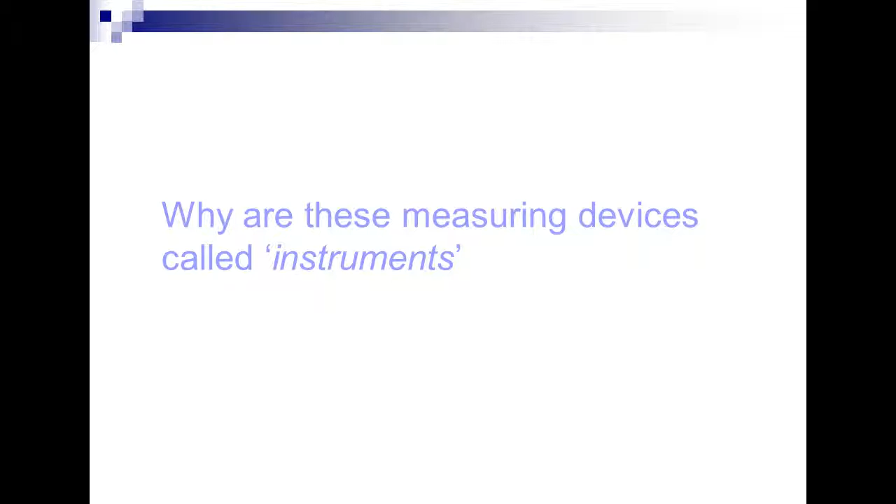So what do we do? What devices will we look at that we measure with? That y'all measured with? Calipers, micrometers, tape measures, rulers - which tape measures and rulers are basically the same - air gauge, right? Okay, tire gauge.

What is accuracy? Tire tape? What's a tire tape? Oh, okay. Round tire - I didn't know that. I always called it a tape.

There you go - free of any errors, especially as a result of care, right? Able to give an accurate result. So this is accuracy. And this slide - this is not my slides, by the way - the guy didn't put his name on it. I wish he did, because it's a pretty good pair of slides.

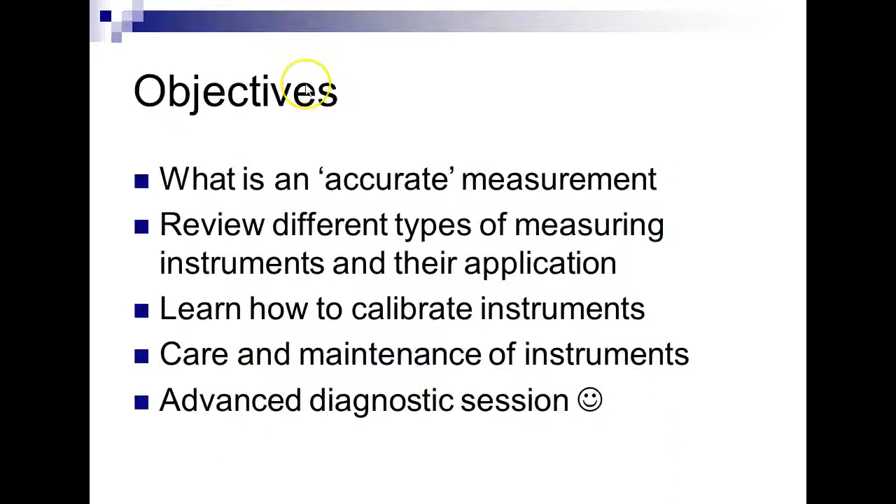But this guy must have been a mechanic. And so what he talks about is failed measurements. We had a Cub Cadet riding lawnmower that we used to rebuild, and we'd do everything. And what happened is we decided to rebuild it, but the people who was maintaining it before for our neighborhood - it was our neighborhood mower - the engine messed up on it, and they took it off and had it rebuilt.

And what they did is they put different heads on it. Of course, the heads wasn't quite as long, so they came in and replaced all the valves, everything that did that. But when we went out there, one of the - what do they call the push rods on the bottom that run - that's what they call it, that pushes up the piston - yeah, it broke. So we went and ordered it, and the guy looked our motor up.

He looked up the motor on there, and gave us the rod. We went back, put it on, and as soon as we started cranking it, you could hear the piston hitting up against the stop because of what? Bad measurements. So when we took it out...

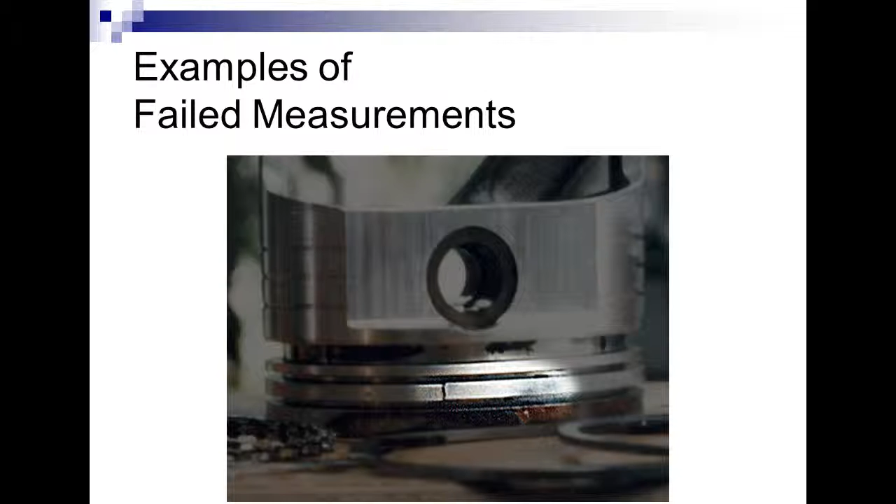The guy come out of the shop - he was really... guys, I forgot his name - he was down here on Highway 150. He came out and noticed a number on the side, and he said it was a different block that they had put on there. So they didn't put the right block on there, so we were using the wrong measurement. Luckily, we caught it right off the bat, and there was really no damage to it, but we had to go out and he had to give us the right push rod for that block.

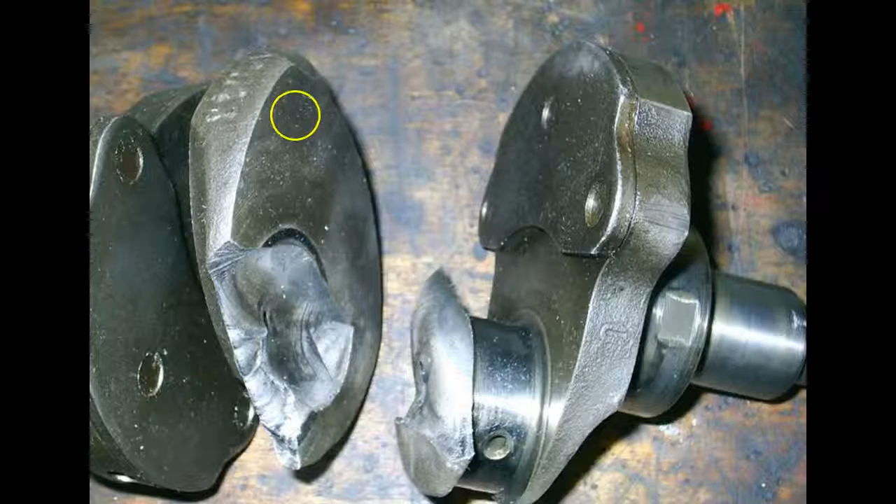So this is kind of stuff that could happen - this is what could happen right here. So just having the wrong measurements, not putting something in there right - it's stupid, right? This is not mine, guys.

So this wasn't in the top - so this guy didn't cover rulers. So we have rulers, we have metal rulers, we have machinist rulers. And so we got this inside our box. So what's the difference between a metal ruler and a machinist ruler?

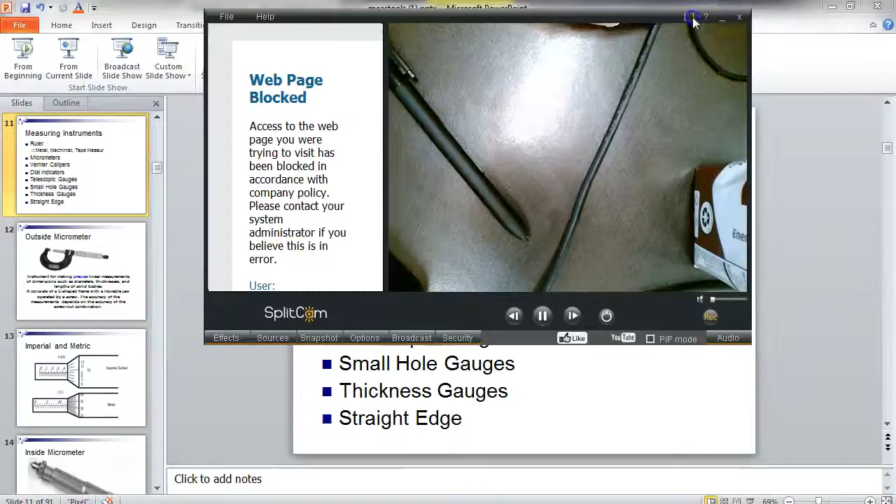Metal ruler is longer, machinist ruler short. So this is our metal ruler. It's in the top. So if you look in the top, it's in a little slot right here. This is a metal ruler. This has inches on one side, and it's got centimeters and millimeters on the other.

Oh, I'm sorry, I got it froze. It is recording. I was looking at the grade book a while ago. Is it up there now?

So centimeters. So this would be centimeters here, right? Where am I at? Way down here, guys. So this would be centimeters. So each one of these small little slashes, there's 10 of them. So those would be what? Millimeters. Yeah. So this is pretty standard for most metric. So the best we could do on this would be millimeters. That would be how accurate it would be.

This is the machinist tool. The other ruler. I must have got it out. Now this one, you can get it in inches also, but this is in millimeters. So this would be 10 millimeters, right? Which would be 1 centimeter, right? You understand? Is that okay? And then this would be half millimeters down there.

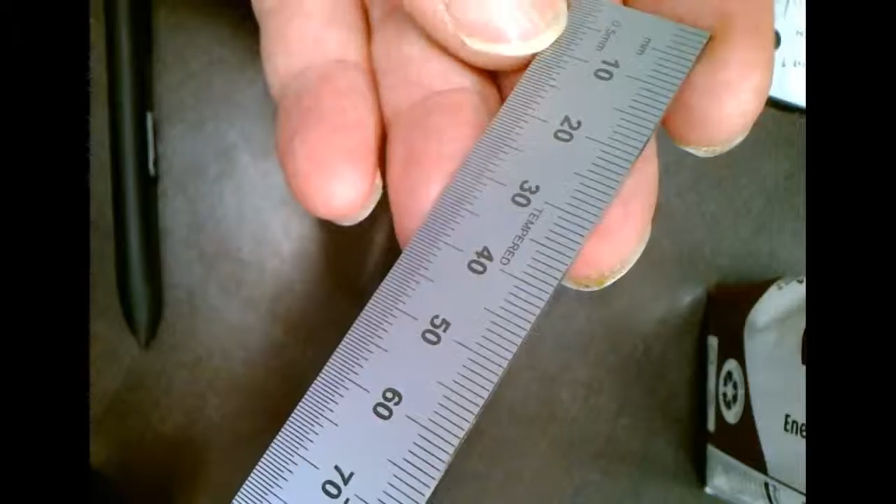This is more accurate. But what makes it the machinist tool is, what they do on this one, because they know these get used a lot in gloves and stuff like that, so to prevent the numbers from wearing off, all these are actually, can y'all run them across that? You can feel it. They're etched in to keep them from doing what? Wearing off, yeah. So that's the difference between this.

So these basically here, and I've got rulers over there now that the numbers are actually wore off just from doing what? Handling. So that's one of the things that they talk about a machinist ruler, is that all the numbers and everything are engraved on there. So it means these right here won't wear out.

Of course, we use these to measure, and we also use these a lot as a straight edge, right? So these things are very accurate as a straight edge. So a lot of times when we're adjusting pulleys and stuff like that, we can lay a straight edge across that to make sure the pulleys and also the gears, the sprockets, are lined up correctly.

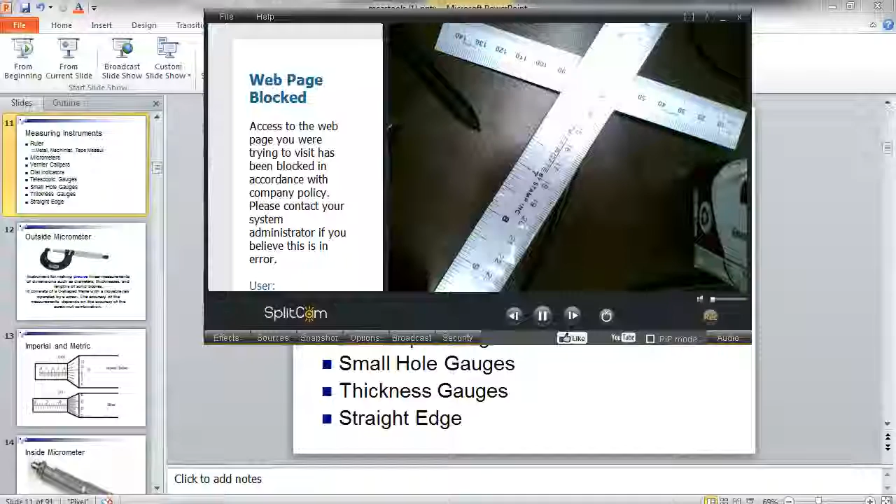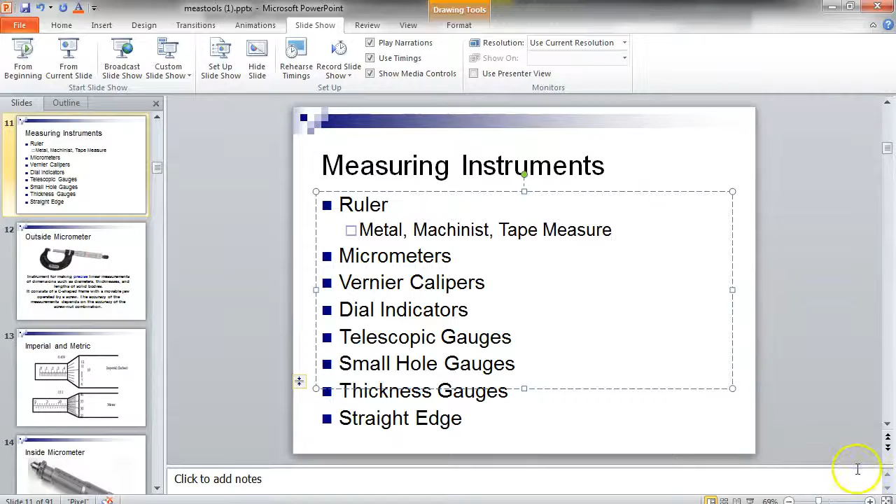And then of course, we have tape measures. So tape measure is also in here. So it's toward the front. So most of us hopefully have used one of these things. Everybody use a tape measure before? Yeah, a flexible ruler, yeah. Now these are not, we got carpenter's rulers. Y'all seen those? They basically fold out and they're big and they're usually made out of wood. And then we got wood rulers and then of course plastic rulers.

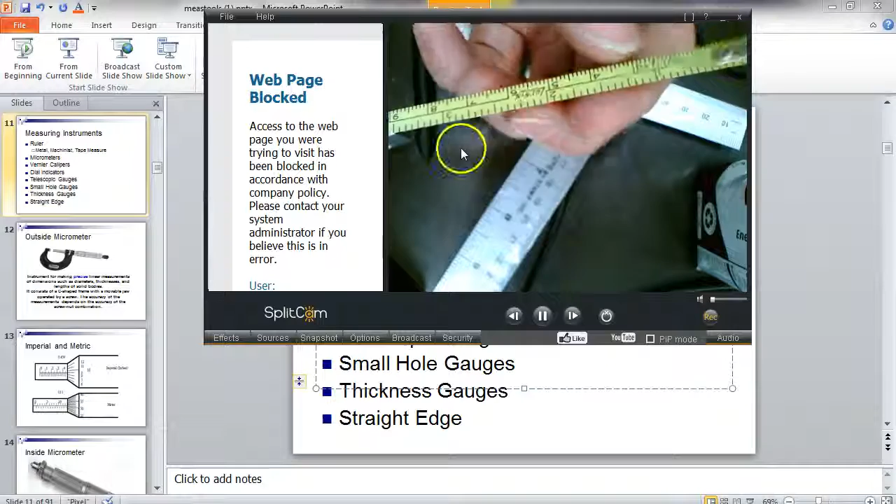So this one here that they've got in here, this has got centimeters, it's got millimeters, and then on one side it's got inches. This is usually the one we're going to use, and guys, you're going to have to get used to the metric system, right? You understand? So slowly, especially in our neighborhood, we're getting a lot of companies that come from over where metric is the thing that goes, right? And of course, metric to me makes a lot more sense because everything runs in tens, right?

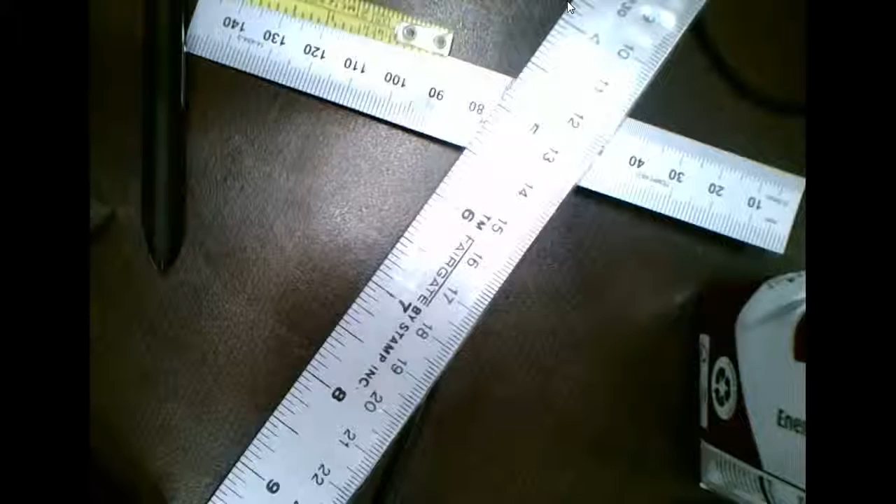So we got, how many inches in a foot? 12. Where'd they come up with that? How many inches in a yard? 36, right? How many feet in a mile? 5,280. Where'd they come up with that stuff, right? But in the metric system, everything moves in what? Tens. Yeah, which is even in temperature. How did they come up with 32 degrees freezing and 212 degrees boiling?

No, foot, I was told it was like a king's foot. Yeah, that's what I learned. It was some king, and an inch was the space between the tip of his finger and his first joint and stuff like that. That's what I learned, the way they came up with those measurements.

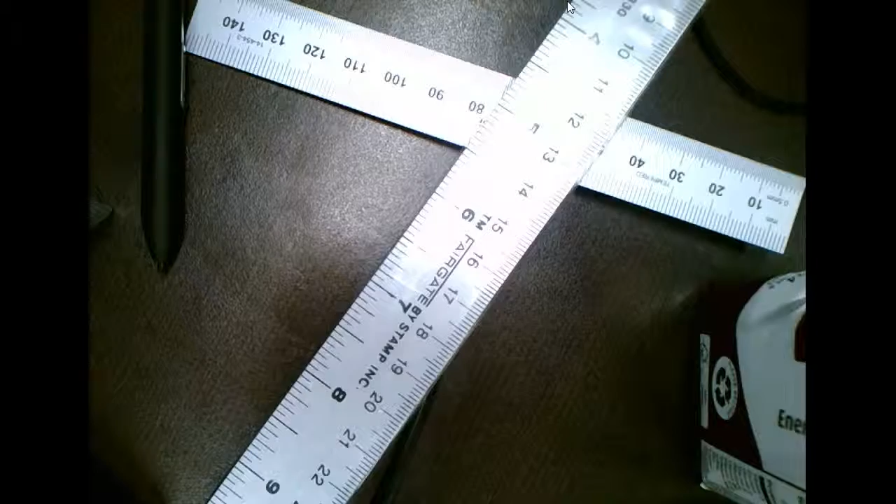Egyptians used something else. They used cubits. Like on the tip of the finger to... Yeah, we used to say a yard was from the tip of your nose to the tip of your fingers. That's why they came up with the yard. But I don't know how they came up with an inch. Why they called it an inch?

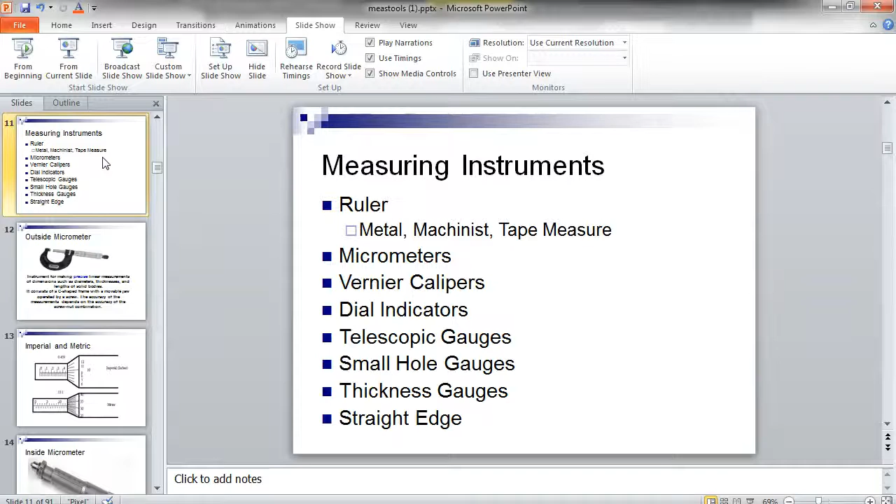So then we're going to look at micrometers. We're going to look at calipers, vernier calipers, dial indicators. We don't have any telescopic gauges or small hole gauges or thickness gauges, but we've got the equipment that gives us the ability to do this. So the first one we look at, so you can pull this out. This is called a micrometer. And this one is fixed.

So this is in millimeters, and it'll measure from 0.01 millimeter, which would be how many microns? 0.01 millimeter. How many microns? That'd be 10, right? So 0.1 millimeter would be 100 micrometers, but most people call it micron.

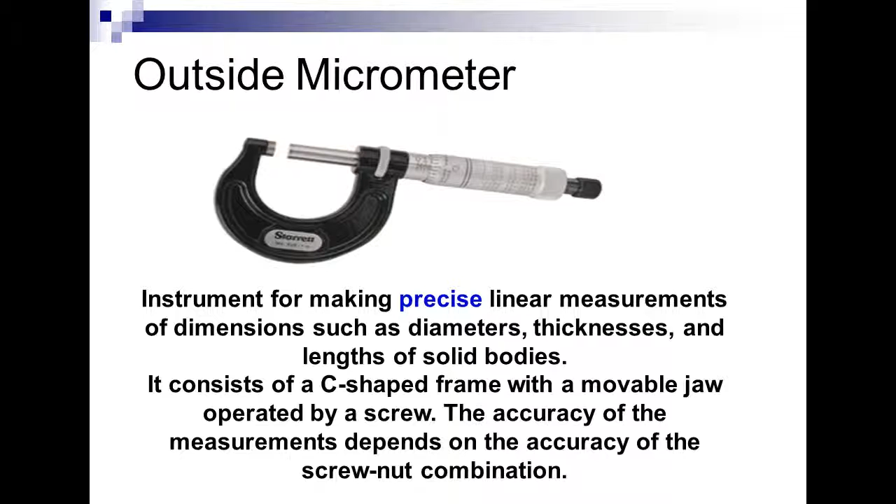So let's look at the parts. Let's see if they tell us the actual parts. Do they? Everybody got one they can see? So we use this to measure outside, right? We use these to measure thicknesses. Everybody okay? So y'all can pick this up and make sure you just don't drop it. We never ever want to drop precision tools, right? Everybody okay?

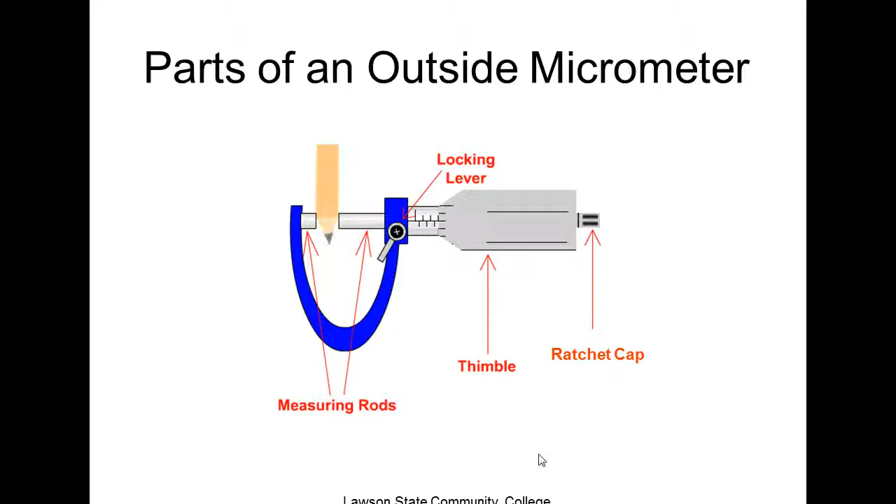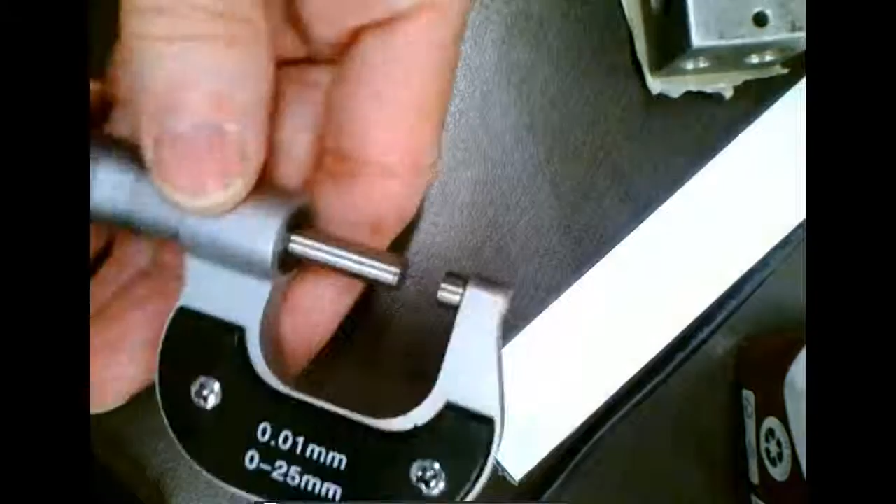Now what we do, guys, is we put what we want to measure the thickness of in between the rods, right? You understand that? And then we start turning the thimble until it gets close. And then we move to the little ratchet and we turn it until it clicks once. Okay. So y'all can just put that in, it don't hurt. So let's just put it on our finger or something like that, and let y'all do that. So this is for coarse adjustment.

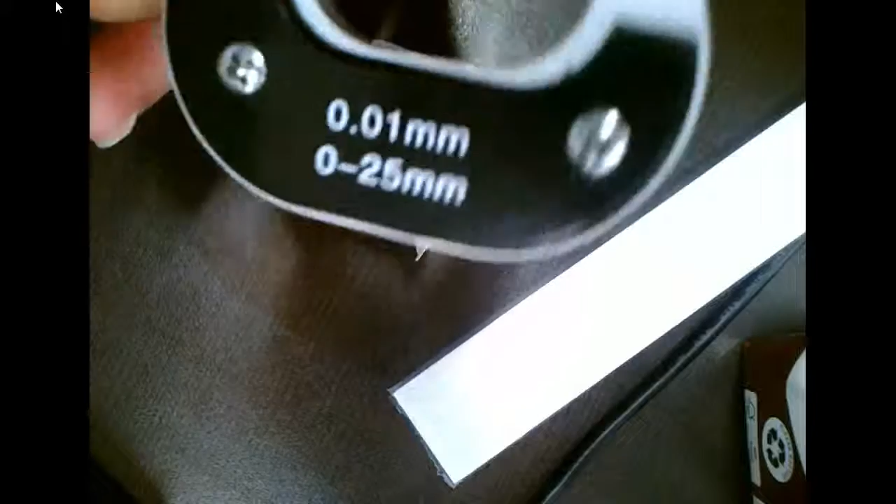And then what you want to measure, let's see if it'll measure this. No, let's do this. I move it this way. It's going to be close. No, it's not going to do it. So what we do is we take this and we turn it until we get close, right? The thimble. We turn the thimble until it gets close, right?

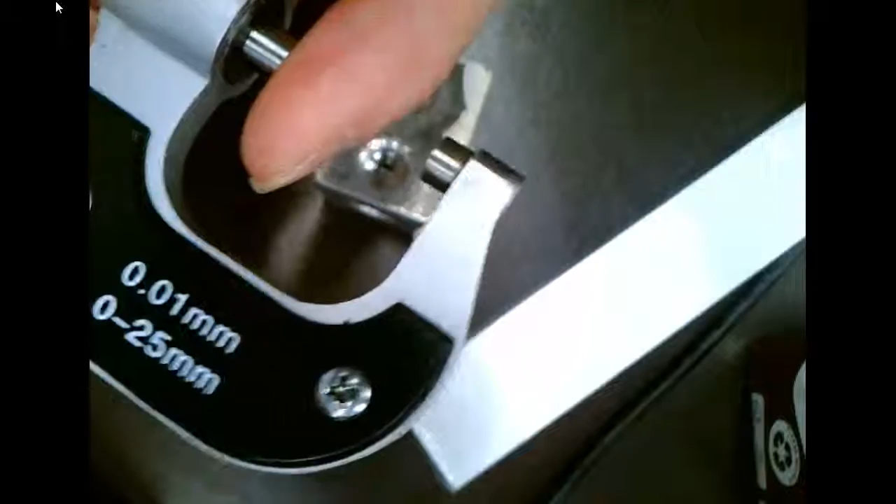And then when we get close, what do we do? We stop and start turning the ratchet, and we want to turn it till it what? Clicks once, right? Raise this thing up. And then when it clicks once, then we've made our measurement, right? Everybody understand? That makes sense? Are we okay?

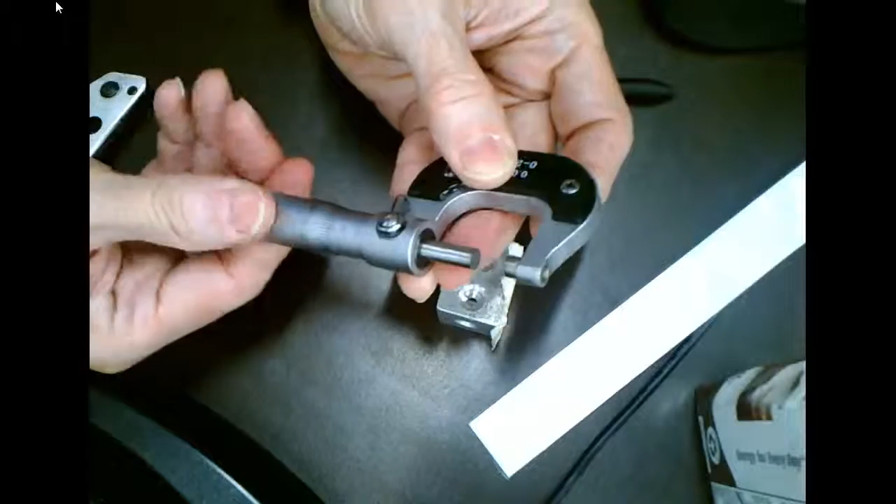Okay. Now this is the locking mechanism right here. So you notice when you push that up, then you can't turn the thimble anymore. And the ratchet doesn't mean anything anyway, right? You understand that? Everybody okay? Yes or no? So how are we going to read this thing? Let's look at the scale on this one.

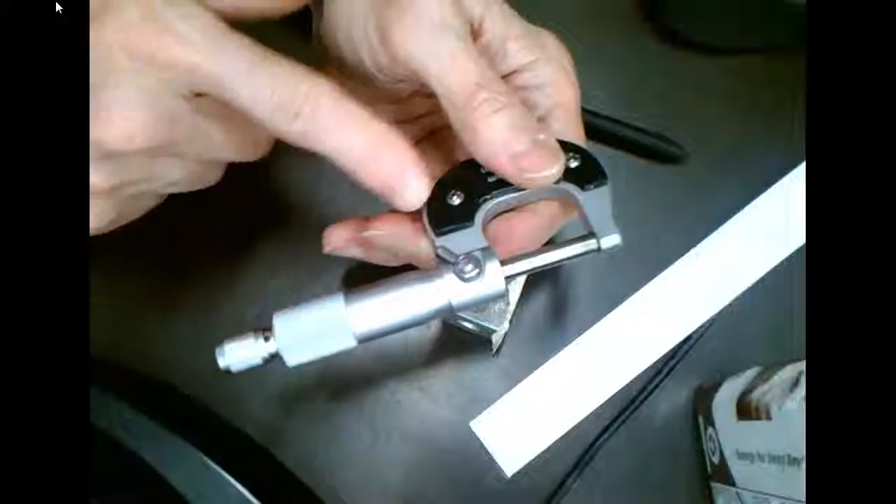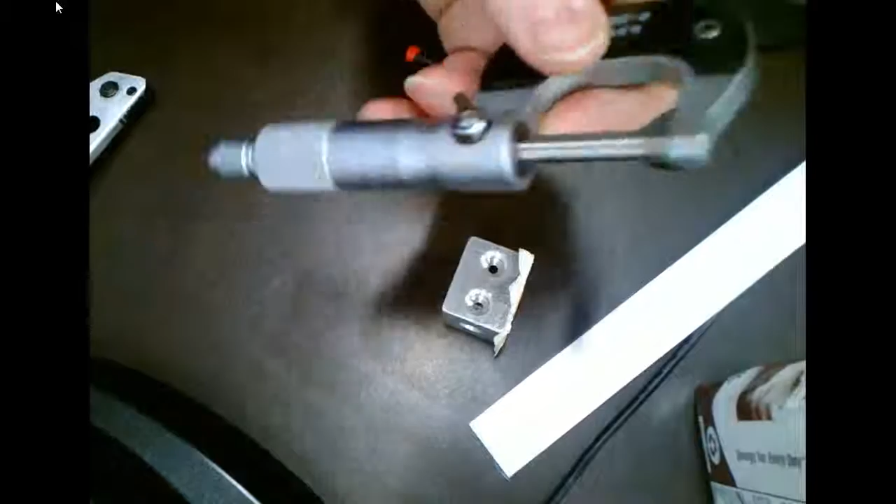First of all, we'll check to see if it's zeroed. So we turn it down, get it close, and then I'll come up here and turn it. So this is off just a hair, so we'll have to show you how to calibrate that. So when I got it on zero, the zero line on the thimble should line up with the mark on the part that the thimble goes into, right? That's what I'm talking about? Yes or no? Okay.

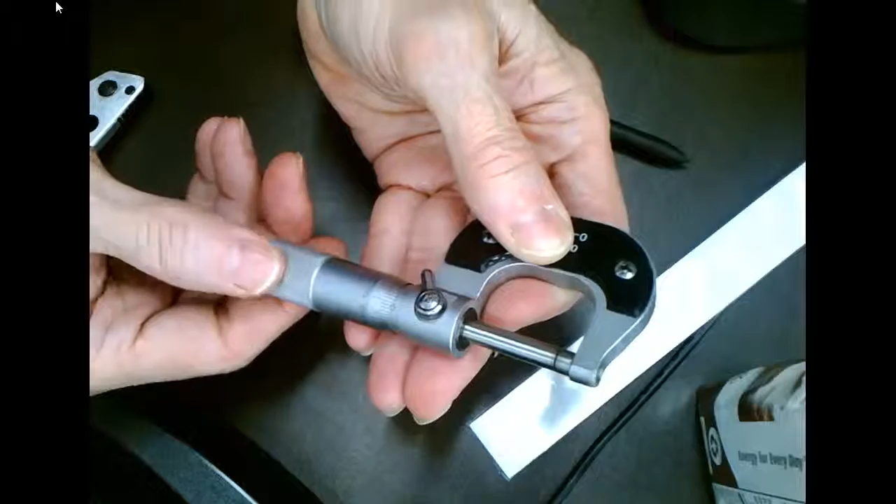So the way we read this, each one of these would be a millimeter. So I just went 1 millimeter. I just opened it up 1 millimeter, right? Understand that? So every time zero comes around, what we do is we look at the major line. Oh, I'm sorry. That is not 1 millimeter. This is 1 millimeter.

Now the way this mic is set up, this is a little different from the inch. See if I can zoom this in. Are y'all listening? Okay. So we got a mark up here, and then we got a mark down here. You see what I'm talking about? Yes or no? Yeah. Okay. And when we look at this, this is laid out in 50s, right? You understand? That makes sense?

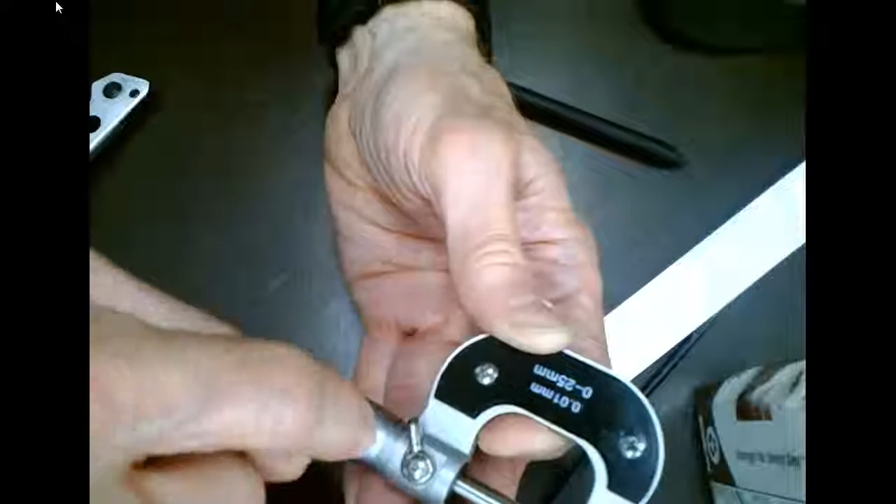So I come up here and line it up, and I start opening it up. Then it went around once to zero, but it's lined up with the minor division, so that's going to be what? Okay, I'm sorry. Okay, so it's lined up on zero, right? And I start opening it up. And I go around, oh, sorry, went past it. Okay, so that's zero right there. What would that be? Yeah, but I'm zero on the first one.

So this is zero. So we're looking at this line right here. So now it's lined up on zero. I know it's hard to see that. Y'all might have to come up here. It's the first one on the bottom. So if I call this the top, on the same side as it's got the numbers, okay, notice it's in 50s, right?

See that? Now when I turn it around to the first 50, that's going to be what? So then I turn it around again to the second 50. 100. And it comes up to the second line, right? You understand? So this right here is a millimeter. Are we okay? Well, if this is a millimeter, so to get a millimeter, I have to go around what?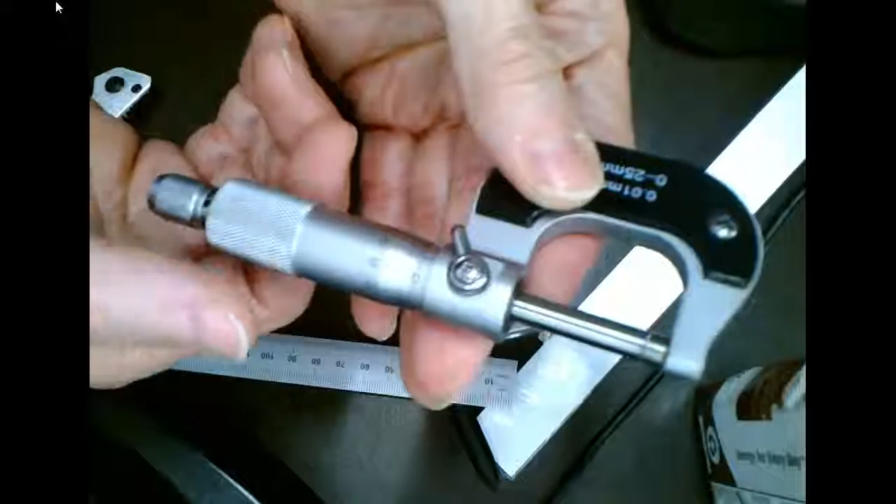So if I come over here and this is 0, right? Y'all understand? Then this right here, when I go around once back to 0, it's lined up on the second, the bottom. They'll come up here.

So this comes in 2 parts. So we have the stand for it, and then we have the dial indicator. The stand is a magnet, and you can turn the magnet off and on. Basically, it just pulls the magnet up. So when you turn the magnet on, if you got a piece of metal, it'll actually stick to it. And then we have all these mounts and this neat stuff right here.

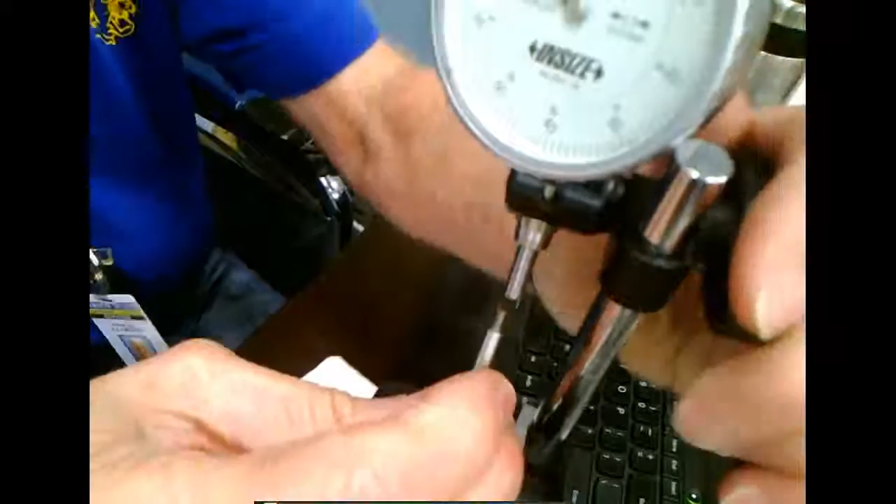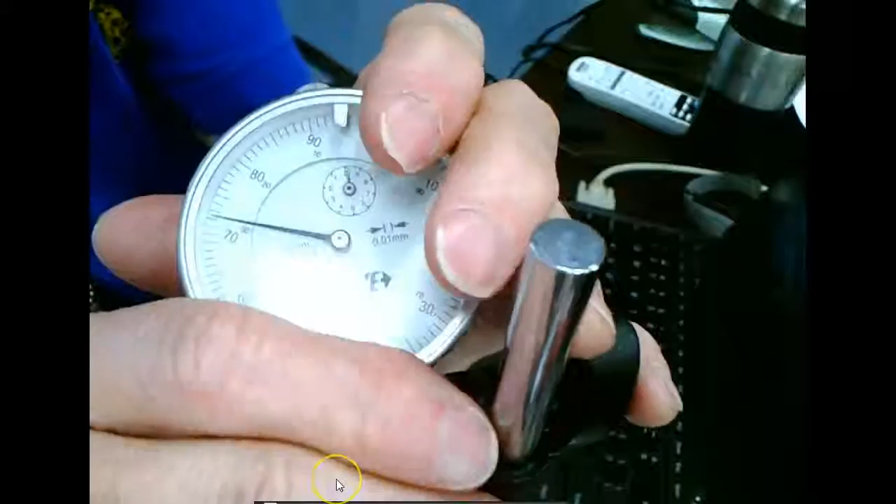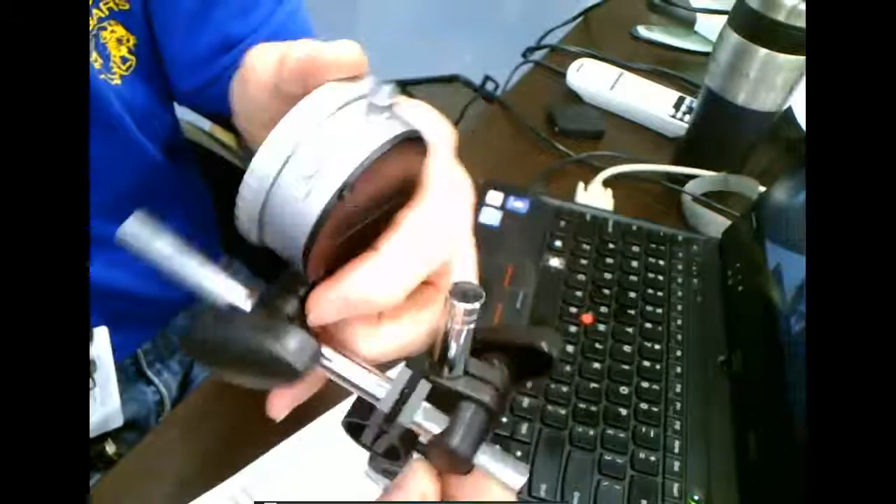So what are we going to use these guys for? Anybody ever use one of these? Okay. So what do we normally use these for? Very small, very small increments. Well, we can use them to measure the roundness of something, right? So what we can do is make sure a shaft is not wobbling on us.

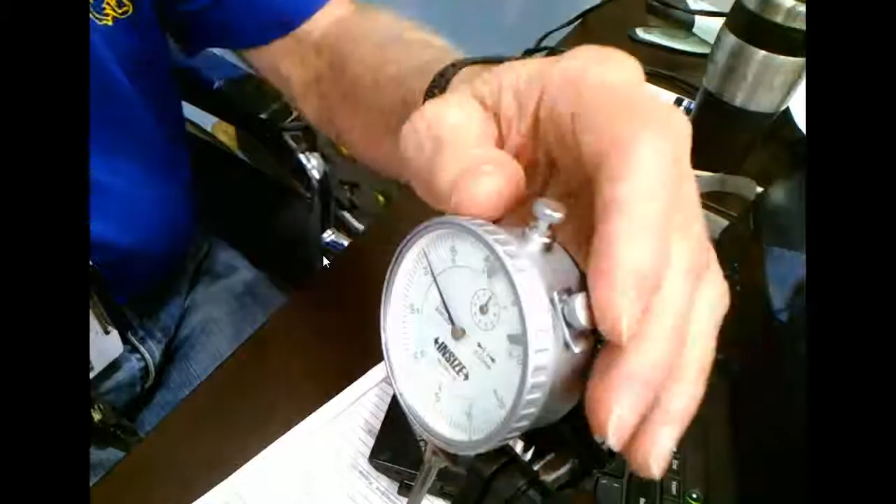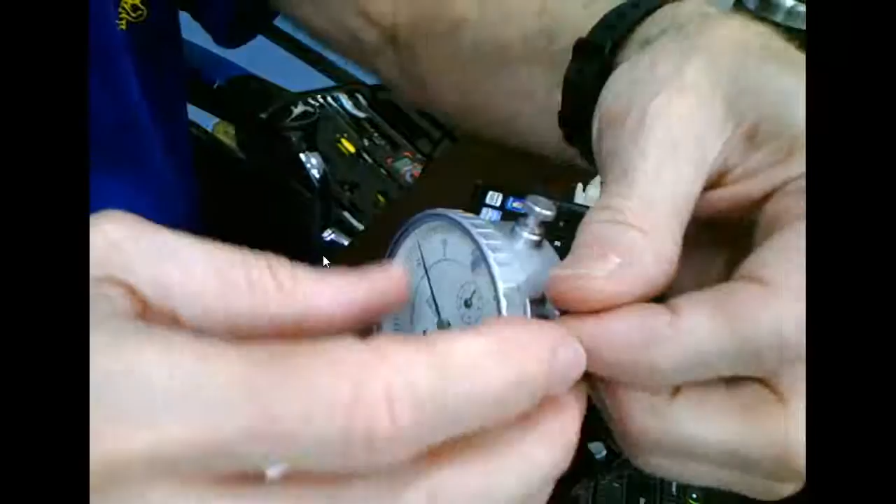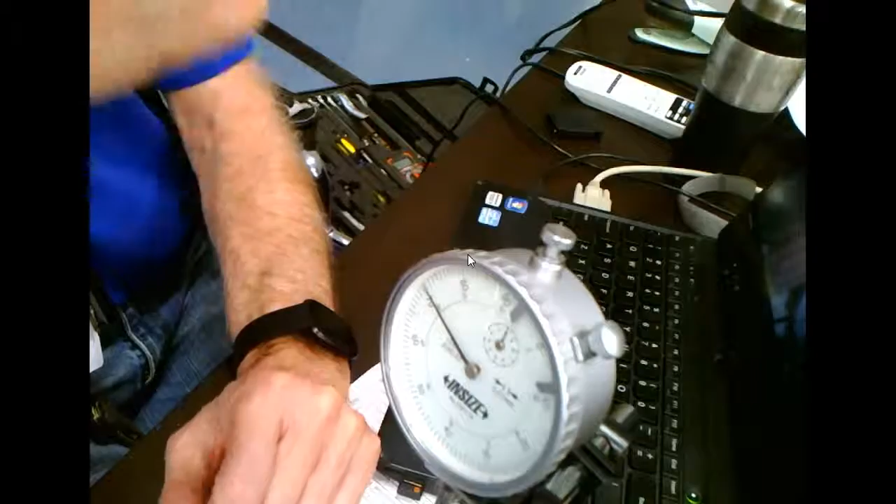So we can set the dial on one part of the shaft. We can zero it out. It zeroes out basically the same way that the caliper zeroed out. So we got this little clamp right here that we can loosen up. So we can put this on a shaft or something, mount it real solid, right? You understand? Put it on a shaft, set 0, and then rotate the shaft. If we ever see any wobble on that, we know that the shaft is not aligned correctly.

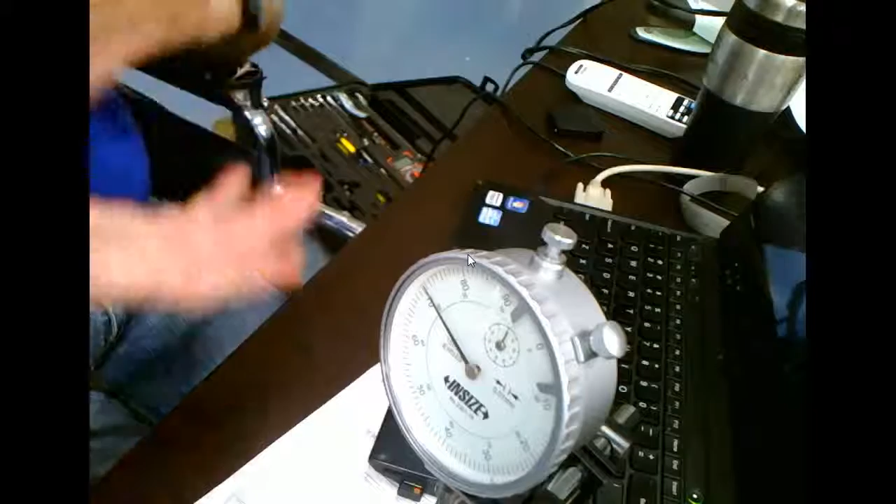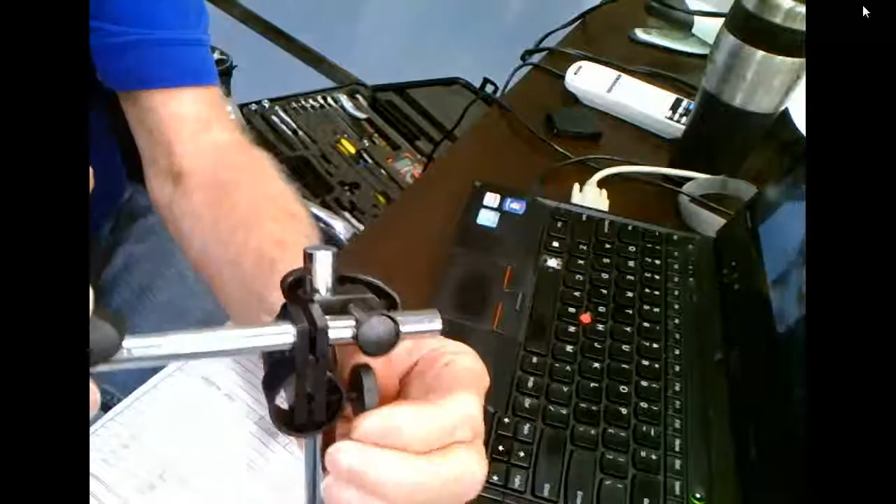So what we can do is swing it around, move it in and out. And then this guy right here would set the actual angle. Can y'all see what I'm adjusting? Yeah, this right here, you can actually change the angle. See what I'm talking about?

Okay, so what I've done is I've got a 0 set on it. And how do we set the 0? We break it loose right here, and then we can turn the whole face. Everybody okay? Okay.

Yeah, it's got the hand up here, right? Okay, so this right here would be 1 revolution. That would be 2. Y'all see what he's talking about? So it's picking up, guys.

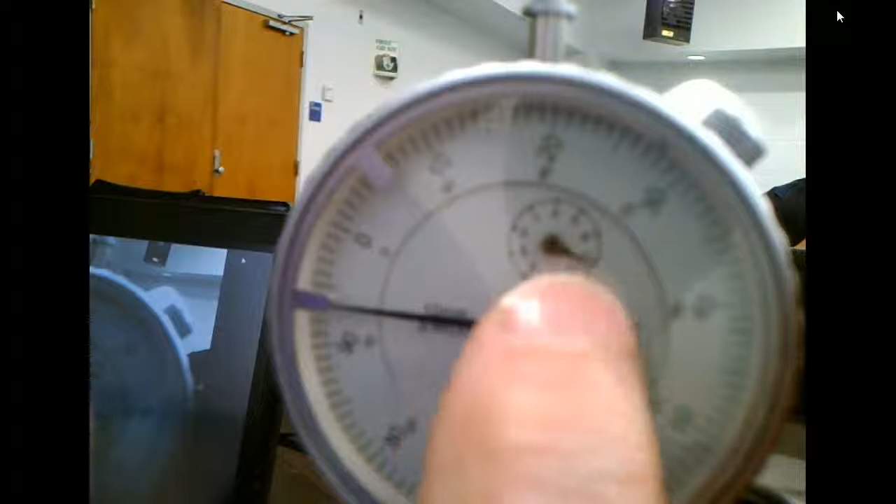So what would you measure? Can y'all see it? So this guy's sitting on 5. This guy right here is sitting on 6. Millimeters, right? So 6.95. Y'all see what he's saying? Can y'all see it? 6.94.

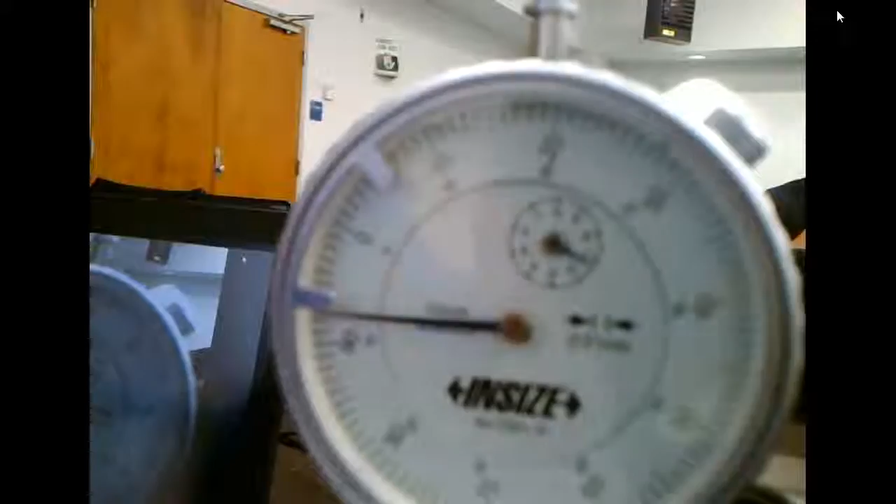Yeah, it's a piece of plastic, it's going to move. Yeah, that's 2. That would be 92, right? 92, right? Yeah, there's 10, right? So that's 0.01.

Y'all see that? That makes sense? Everybody okay? I see machinists use this a lot just to check, make sure the part is flat. So they'll move the part under there and see if it moves up and down, checking to see if their milling is done correctly.

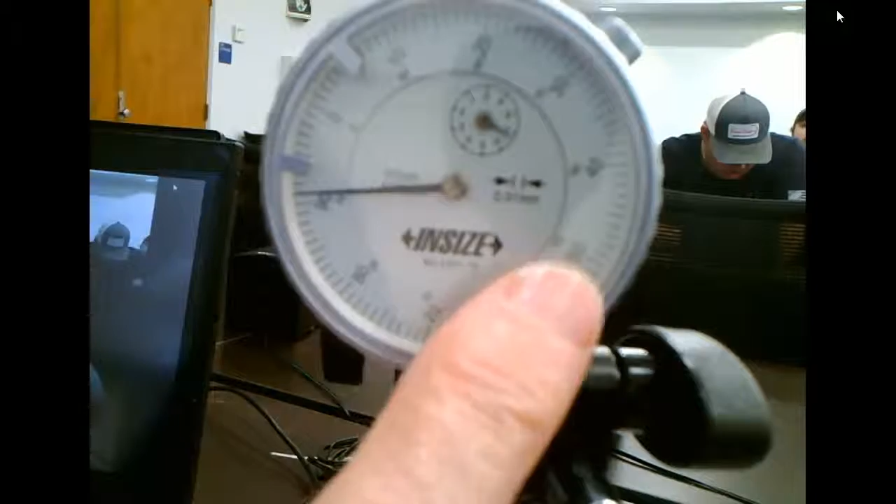I'm sorry, let me move it back a little bit and see if it'll focus. It almost focused. So I got a different measurement. This is made out of plastic, this is made out of... Oh, there we go. So now it's measuring a little bit different, but notice it's more than 6, less than 7, right? You understand that?

And each one of these minor divisions would be worth a what? So it'd be 6.98 millimeters. See that? Yes? No? That makes sense?

We have focused them real good. So first thing we do is look at our major divisions right here. Then we drop back and look at our what? Minor divisions. Everybody okay? That makes sense?

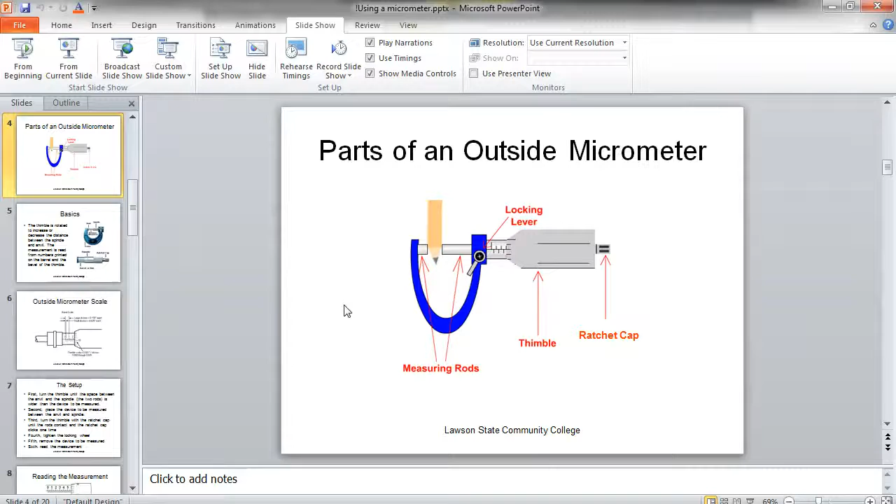We'll get different measurements. We have depth gauges, we have all these different things. Just about these 3 tools, though, you can make just about any measurement you need to make. So the rest of the PowerPoint shows you how to read it, right? Which we've already looked at. Set up. Forward.

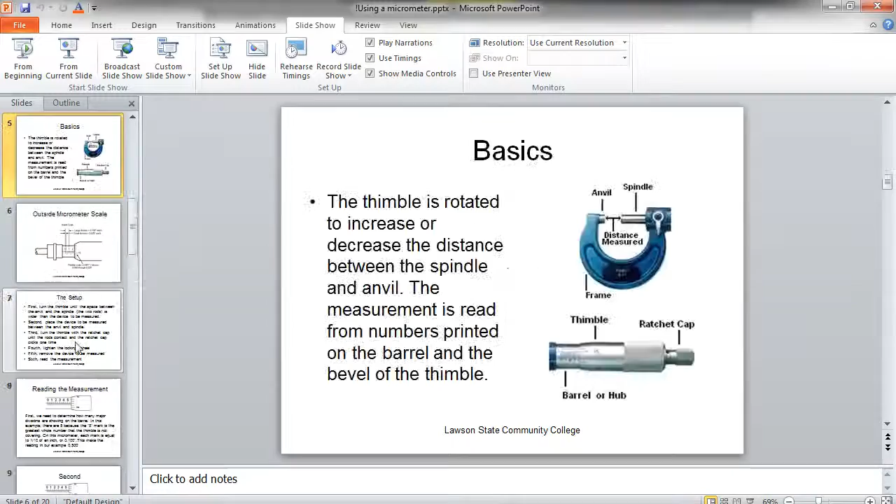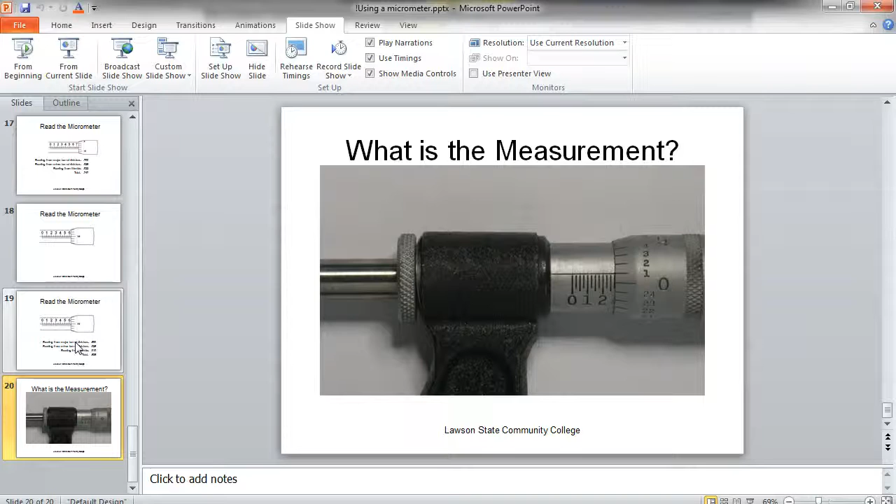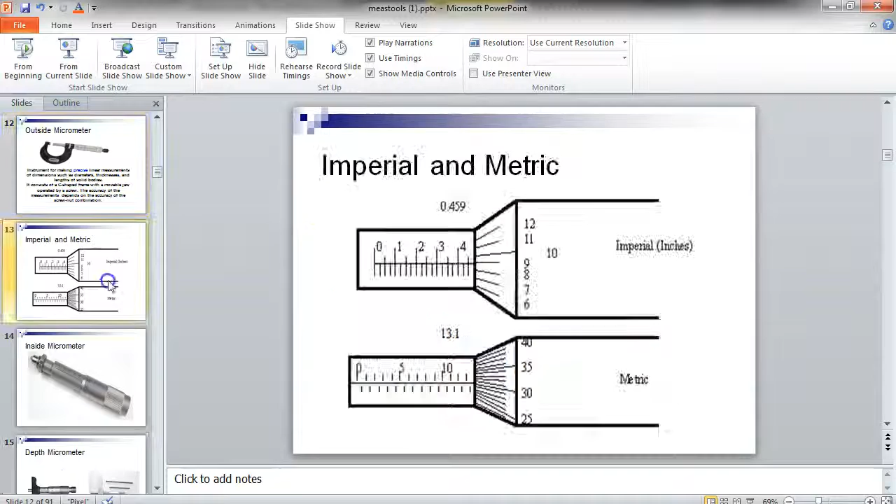Inside mic, but we can use our caliper for that, right? Depth micrometer, we can use the mic for that. Digital is really nice, this is what everything's going to. But what I say, if you learn how to read the mechanical ones, then you understand the digital ones a lot better, right?

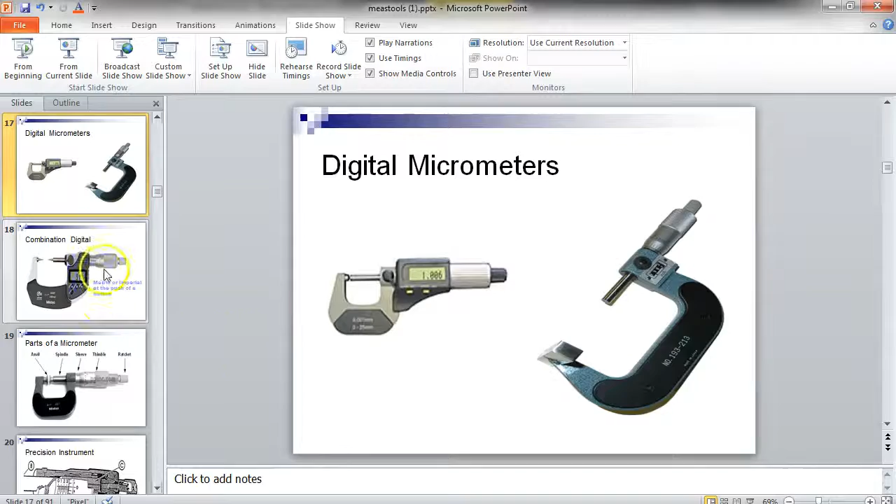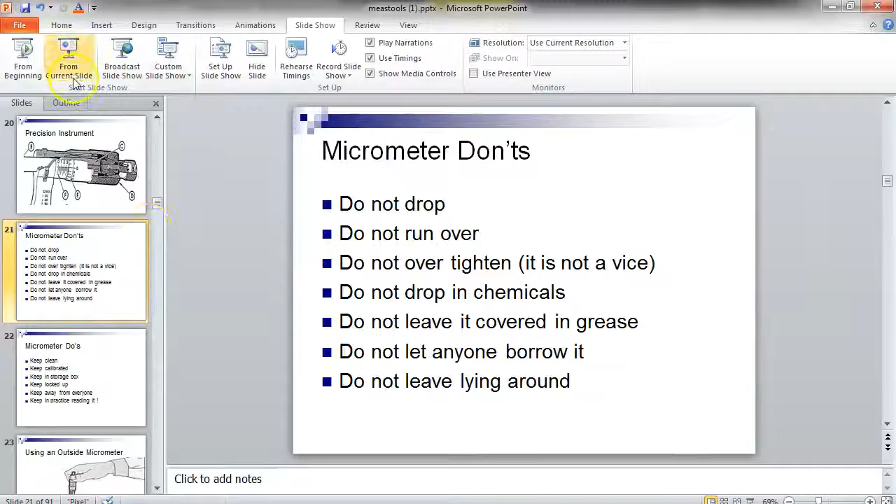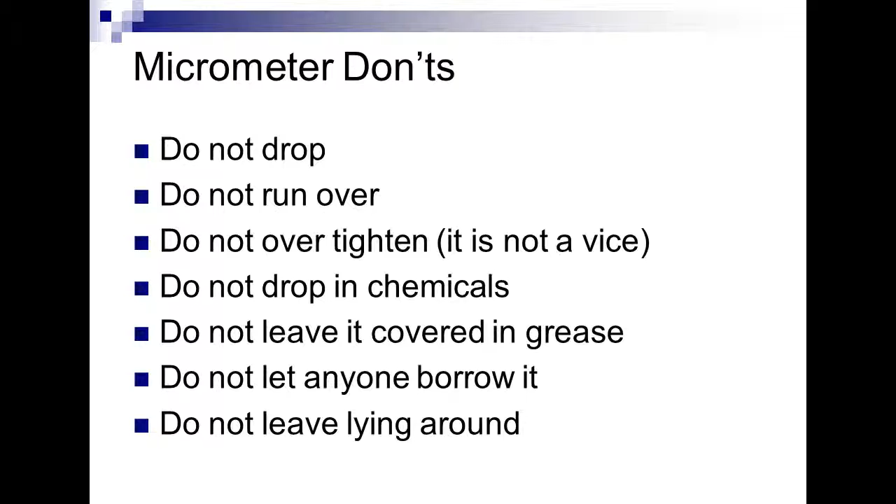So don't what? Don't drop. Don't run over, right? Don't over tighten them. Don't leave covered in grease. Take care of it. Don't let somebody borrow them, right? Don't leave laying around, right? And then fuss at them when they do that.

Keep locked up. Keep away from everybody. Keep in practice reading, right? These are pretty good rules.

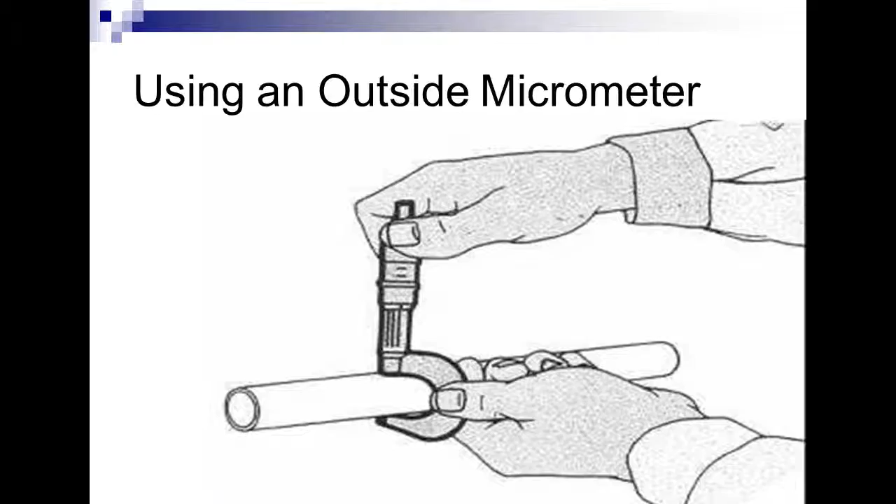Okay guys, what we'll do, when's our test? Next week. And we've got, we're doing okay. So let's look at our calendar. Right now we got one more thing we'll look at, and we'll finish the theory up at the first of Monday's class, and then Monday and Wednesday we'll work with putting the robots together and soldering them. So what we're going to do is...

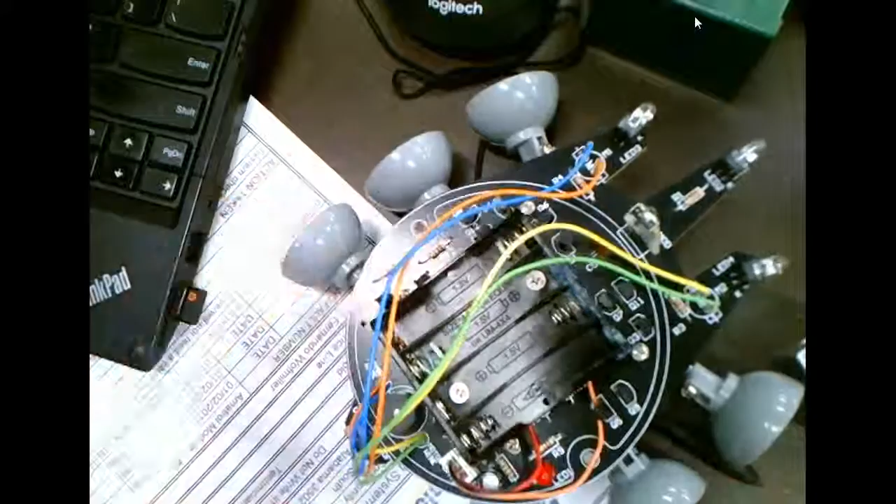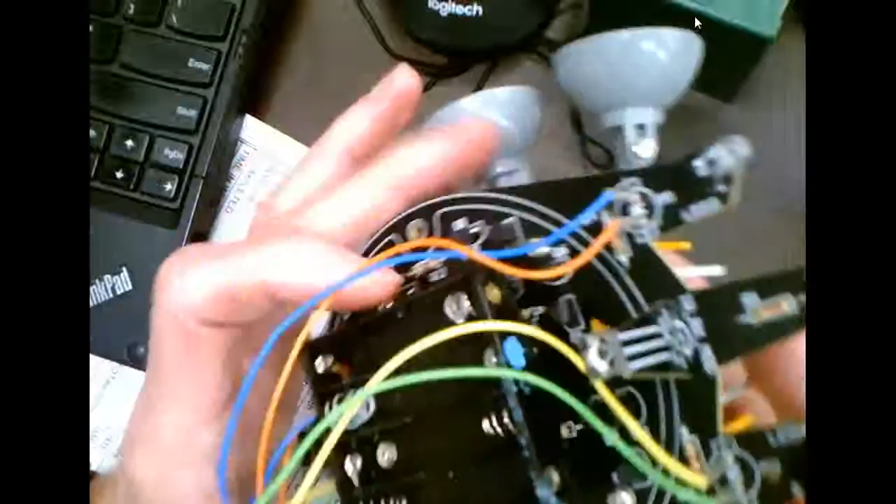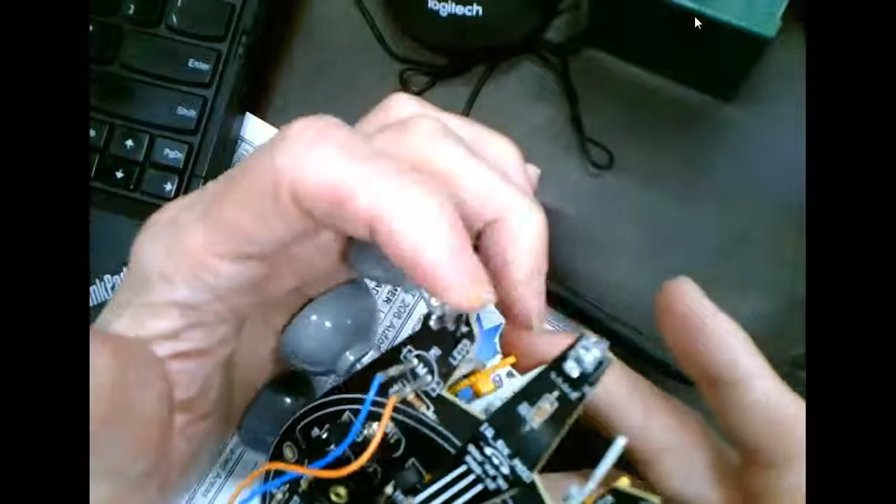And this is a pretty neat kit. So this is what we're going to put together. It's called an avoidance robot. And what's nice about it, it works. We got a gearbox we put together, right? You see gearboxes, we'll get to play around with soldering. This guy runs off a microcontroller, so we'll let y'all play around with soldering a little bit. This is a diffuse sensor, but it works in conjunction with these guys right here. So what does the diffuse sensor do?

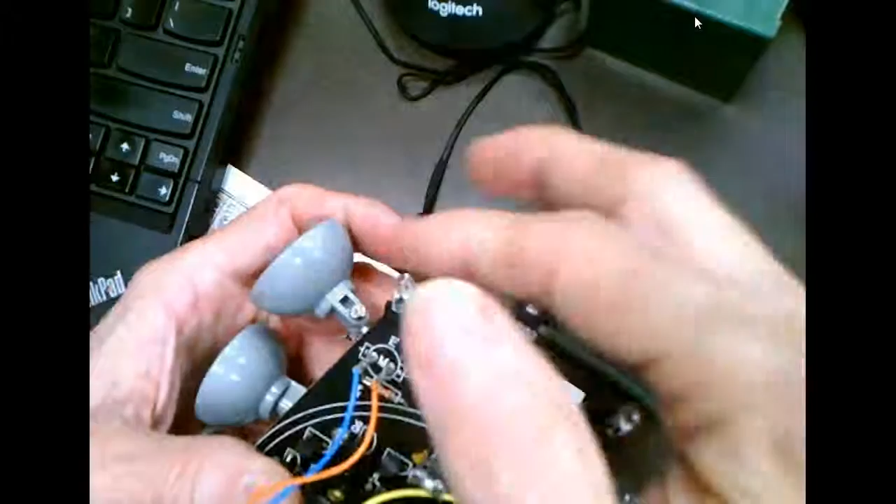How does the diffuse sensor work? It works off reflected light. These things right here are infrared light emitting diodes, and the way the program works is it pulses one of these at a time. If it sees reflective light, if it sees this one reflect, the controller will turn it that way. If it sees this reflect, it'll turn this way. If it sees this reflect, it'll turn basically all the way around. So these are avoidance robots.

It works off a little microcontroller up under the battery pack.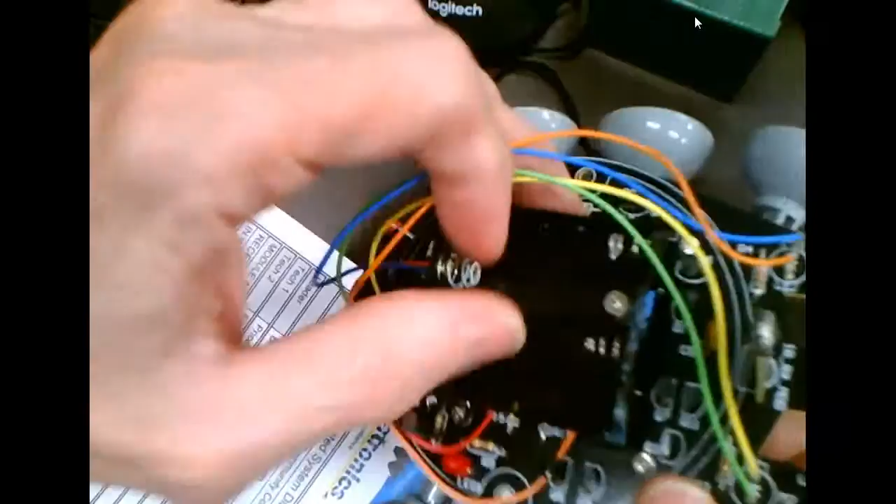By the way guys, if you're not going to use something for a while, you need to take the batteries out. Somebody left batteries in this, and eventually alkaline and carbon batteries will eat themselves up because they've got acid in them. Then all that goop runs out and gets on your connectors, and it eats the tin coatings off of them, and they'll rust real fast. So anytime you've got something you're not going to use for a while, take those batteries out.

So this is what we're going to be putting together, and we'll split it up. Some of y'all will be mounting and soldering, and some of y'all will be building the gearbox, then we'll swap so everybody gets a chance to solder and work with the gears.